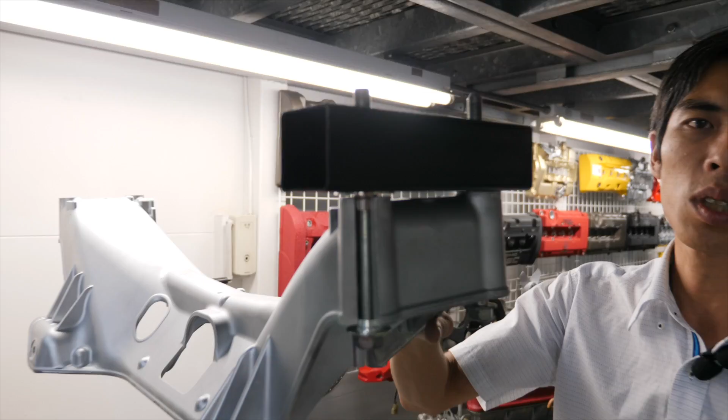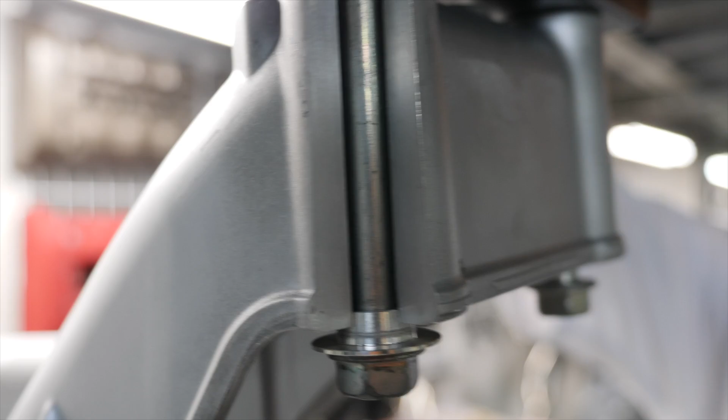Imagine this is the underneath of the car. This little aluminum structure here is what holds the suspension and the arms, and you've got the wheel and tire over here, and all these bolts are what link this frame onto the body. So the body is represented by this square block here, and this is the subframe. This one in particular is made of aluminium. From this hang all of the arms and the suspension.

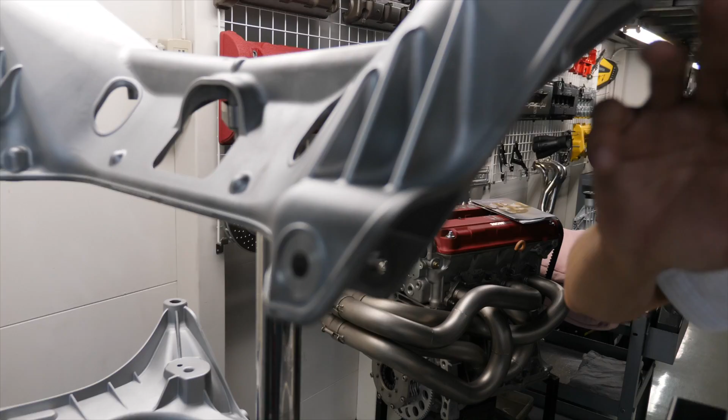For example, here would be a lower arm, and on this structure here, you can see that it's a rear structure frame. And this is an important part of the chassis because it holds the geometry of the suspension, and therefore, if it is not straight, you get discrepancies on the left and the right. Now, why is this so? A little explanation which is in this booklet.

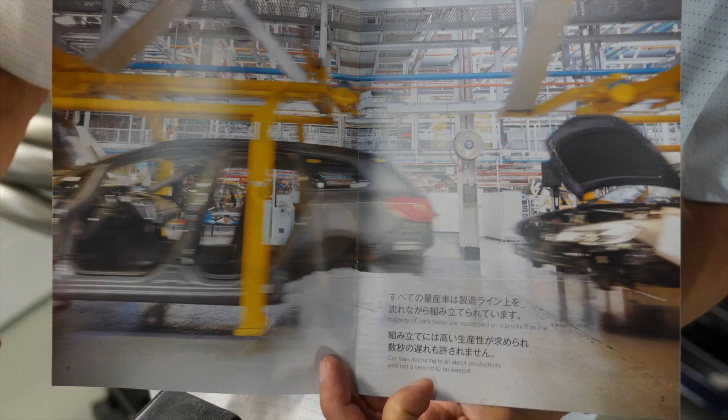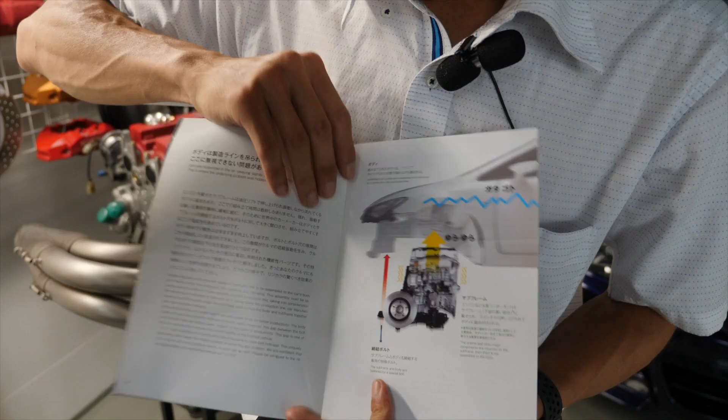Now, you can see here the production line of a vehicle as it is being assembled in the factory. A majority of cars today are assembled on a production line, and in a car manufacturing shop, it's all about productivity with no waste. So let's have a look at what happens when you have the body, which is suspended by a crane, held up mid-air, and the subframe, the suspension, the engine, all of it is added from below, as in this picture.

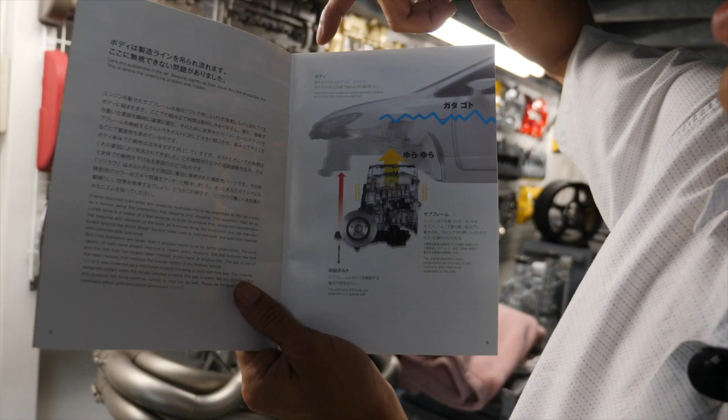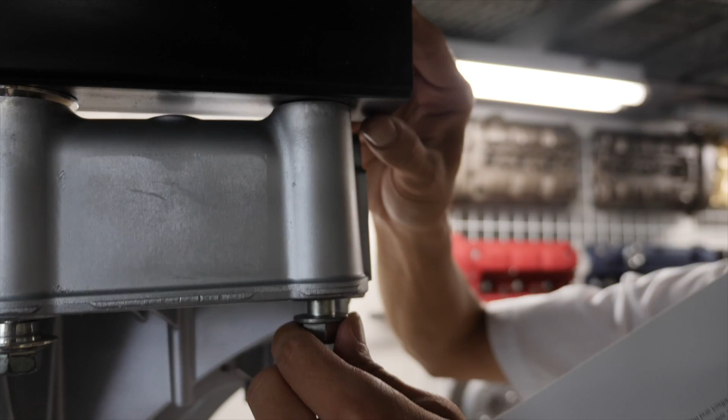And so these cranes are holding the car, and it's not stiff, it's kind of moving about. As the body is moving through the production line, it's swaying back and forth, and therefore it's not going to be exactly centered into the holes of the body. So represented by this, if you can see here, there is a bit of clearance and a gap, and therefore with this gap at all four corners between the body and the subframe, it will settle in maybe not precisely in the center. If you look here, you can see how there is quite a bit of clearance.

Now, what's the reason for this? Why don't manufacturers make it precisely in the center? Because it would take a lot of time, and production speed is important in manufacturing cars, and that slight difference can be offset by things like better alignment, and it doesn't really make that much of a difference to a normal driver.

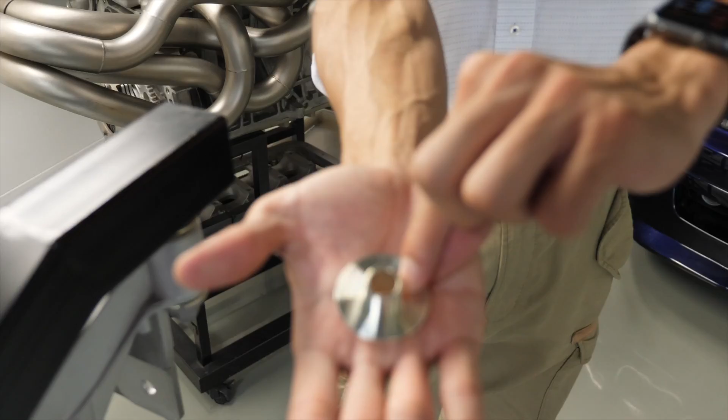But if you're an enthusiast and you are a driving maniac and you want to get that precise feel and have your car realizing its full potential, you want things exactly right in the center. It's the precision that is important. So the question is, how can a small piece of aluminium collar like this change the way your car feels on the road, the apparent stiffness and difference in handling?

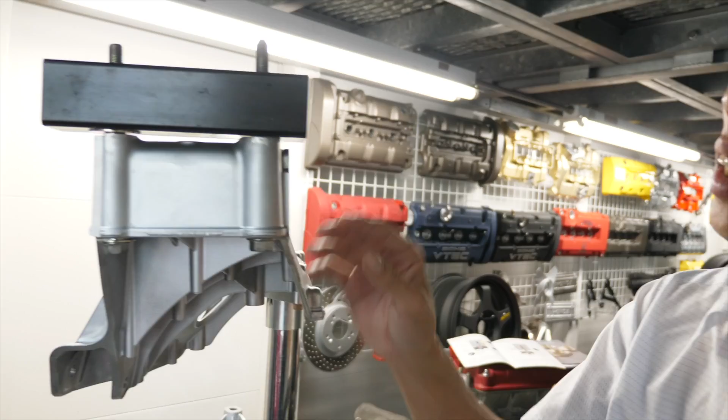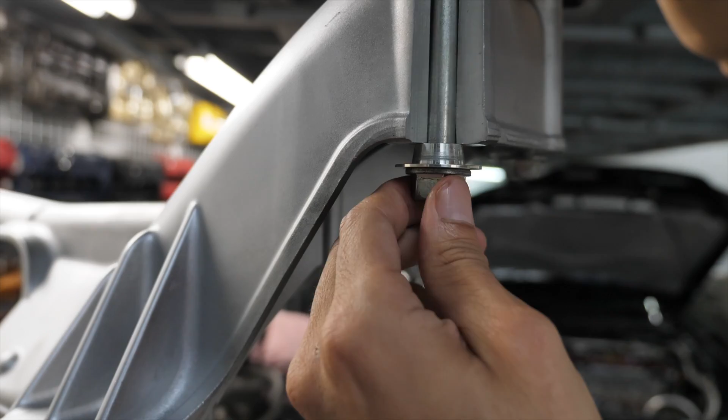Let's have a look at this cutaway model. So the collar goes in between the subframe and the body. It's really simple, and as you are tightening it into the body, let's loosen this for a bit. So let's say like that. Here you have little collars that are going into the groove of the subframe, and when it goes down, it actually centers the body onto the subframe.

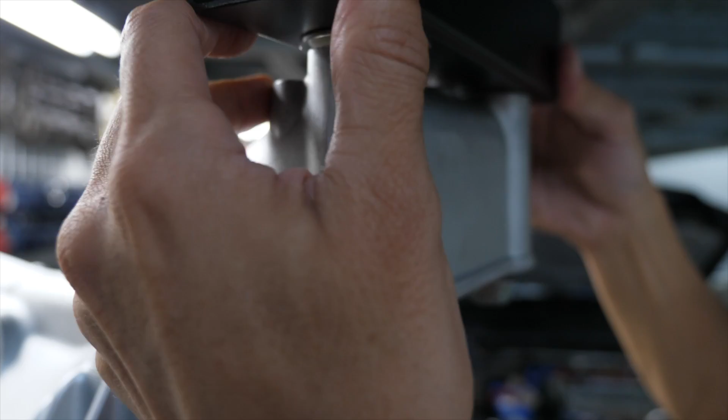So here it's not moving, and here on this side, without the collar, you can see how it's loose, and therefore if it gets tightened, it's not going to be exactly in the center. So this is the apparent problem. You can see also from this diagram that it explains that without the collars, there's actually a little bit of a gap. Now, some cars are designed with a 24mm bolt and some with 14mm bolts.

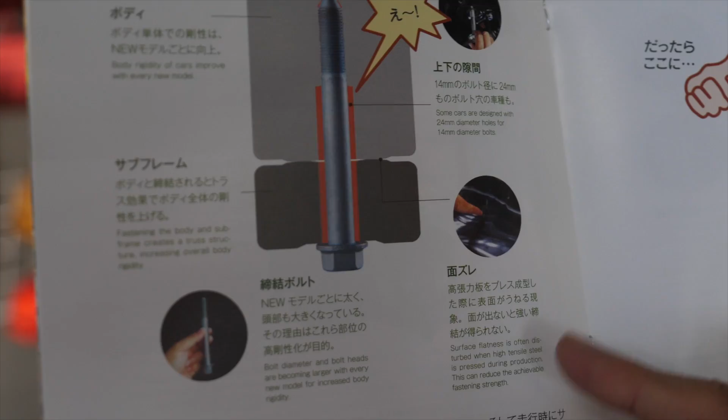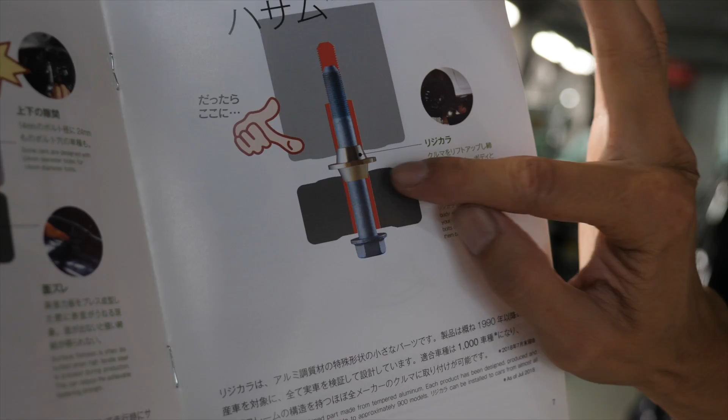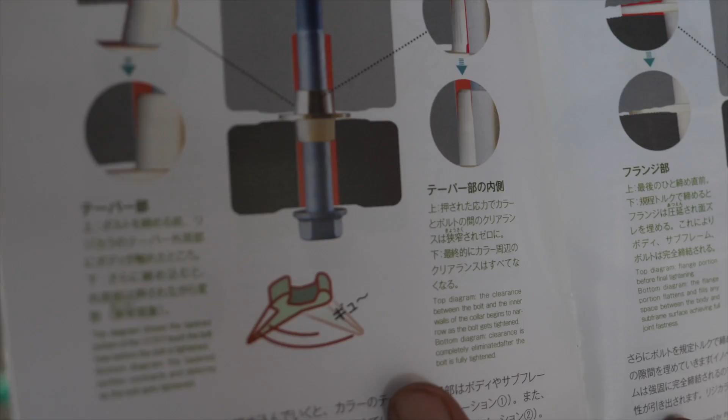And therefore, because of this surface flatness difference, it can actually be a little bit off-center. Now with these collars, it will be a perfect fit. What happens is these angles over here just squeeze into the gap, filling up this gap, and it gets crushed in, squeezed down like that, and therefore it creates a perfect fit, which also contributes to a feeling of body rigidity. Because if everything is centered and it's squeezed in tight, the feeling that you get is going to be less vibration and more accurate steering.

So once we get it fitted on the car, and we're going to have a look downstairs now at the whole process and the meticulousness in how they fit it by Spoon mechanics themselves, we'll go for a test drive and see how it really feels.

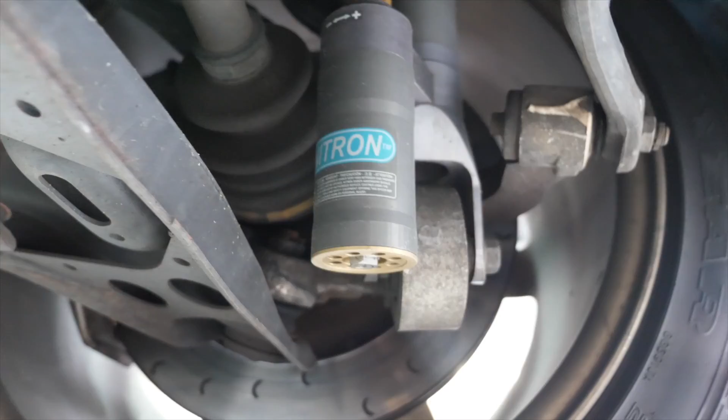Let me tell you about the suspensions. Suspensions are Nitron R3, so 3-way suspensions. They're pretty good, pretty nice. So riding quality on this car is not bad with those suspensions and big strut bars and stuff. We will see how it will change after we install those. I don't even know what to expect, to be honest, right now.

Does it feel loose a bit? It doesn't actually. I had a different 34 before. It was mostly stock 34. This is slightly tuned to 600 horsepower. You can understand the shake on the camera, I guess. It's not bad. It's not too soft. Actually, the suspensions are in the softest setting right now, since I'm not on track or doing touge or anything. In the city center, it's mostly the softest adjustments.

Let's do some pulls if we can, right there. Oh, I shouldn't get any other fines. I got fined yesterday. I got the police. I was speeding. They are making the car. They are making the roads. And I am only allowed to use a quarter of the speedometer. But I paid for the whole. I don't know. It doesn't make sense sometimes, right?

So this road is a little bit bumpy. And let's see the camera's reaction to... It's good. It's good. It's not that jumpy or bumpy or soft either. But we will see the difference after we install the rigid collars. Okay.

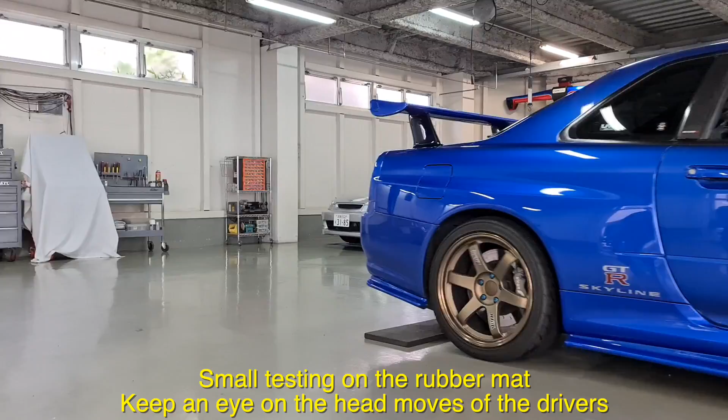You got that feeling? Yeah. All right. One more time. I got it.

So now we're going to begin the process of fitting the Spoon rigid collars onto the Skyline GTR subframe. Let's have a look. Here's the box that you'll get if you buy these Spoon rigid collars. And inside there are instructions, very conveniently, in Japanese, of course. If you don't read Japanese, fear not. If you're a home mechanic, you can read this. It's written in very proper English with clear instructions on how to fit the collars and what steps you should take. But we have the great opportunity here to have it fitted by the Type One mechanics themselves. So we're going to show you the whole process. Let's go have a look.

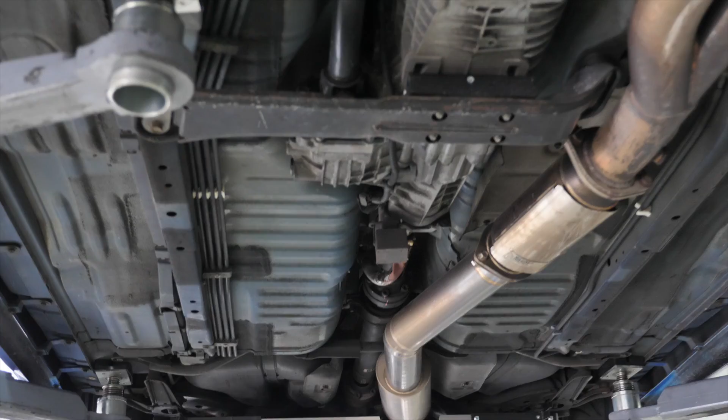Which parts do you put it on? No? Yeah.

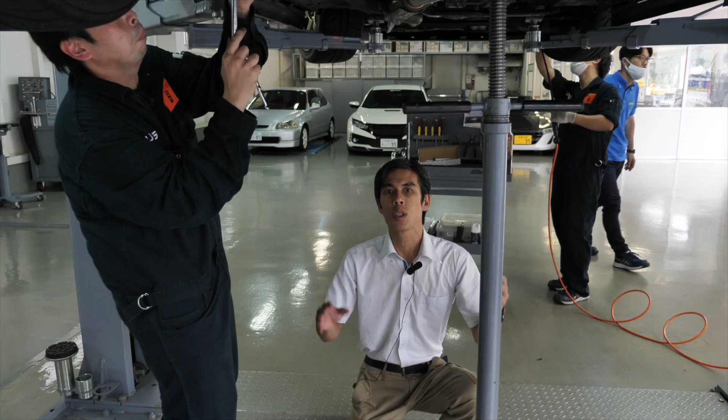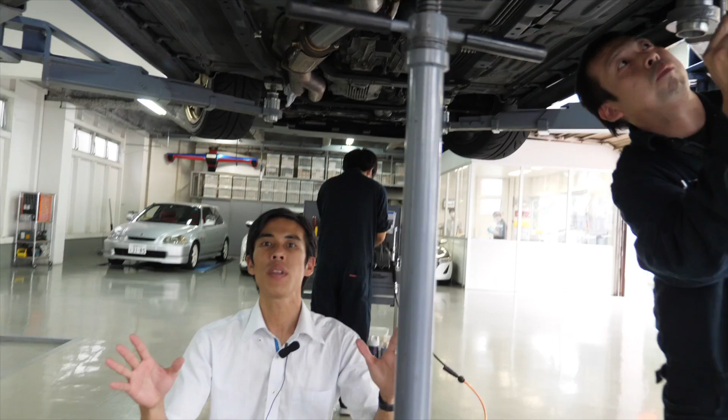And so we are now in the installation phase of the rigid collars into the subframe of the Skyline GTR. Now, with a subframe, you don't really have to remove the entire thing. As you can see, the mechanics are simply removing the main bolt that holds the subframe to the body. And this is where we're going to put the thin aluminium but very effective collar in between the body and the subframe. Hopefully we will see good results in stiffness and handling.

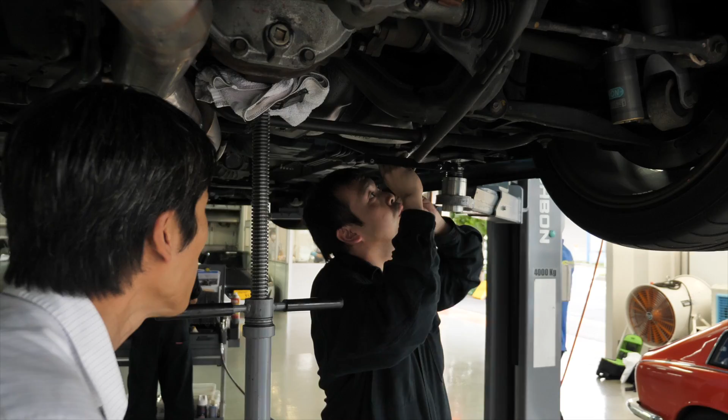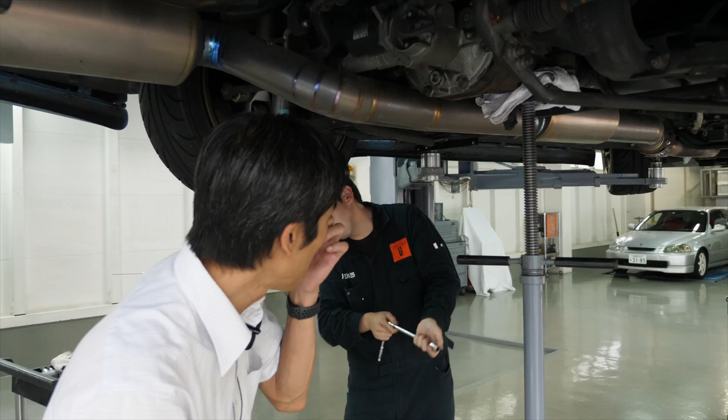So you can see now how the mechanic is carefully checking with a little mirror, just to check the clearance of the shim to see whether it's positioned accurately underneath the body, and it's a fine line, because the whole subframe doesn't actually need to be removed. It just needs to be centered slightly to fit those little collars in, and it's fitted delicately to make sure it gets into the center before tightening the bolts again.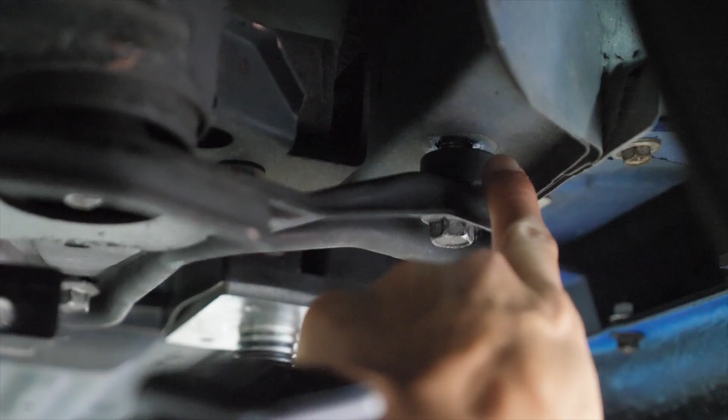Now we'll probably have to go and run it for a while to let it set in, and it's probably best to get an alignment after that. The good thing is that the car already had a good alignment before, so it was a good test of equal conditions. Now there is a gap between the lower frame, this is actually the stabilizer, and the body here.

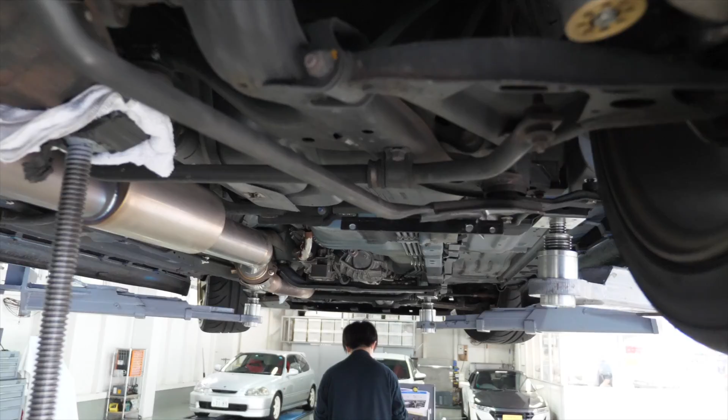So it's in the loosened position, and we're going to start tightening it evenly left and right. And the last process will be to torque it according to spec. And it's very important to do this process because every bolt in the car, actually in any machinery, has a correct torque value. It needs to be carefully done by a very accurate torque wrench. And it's all skill of the mechanic to also do this.

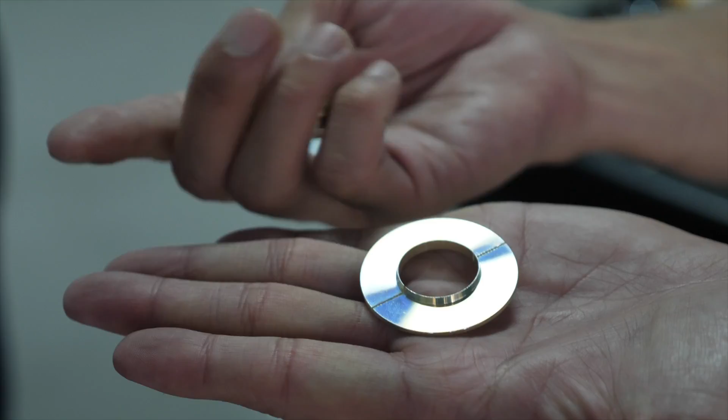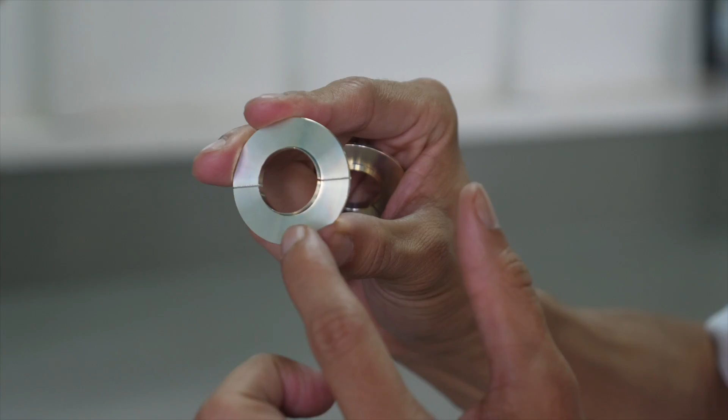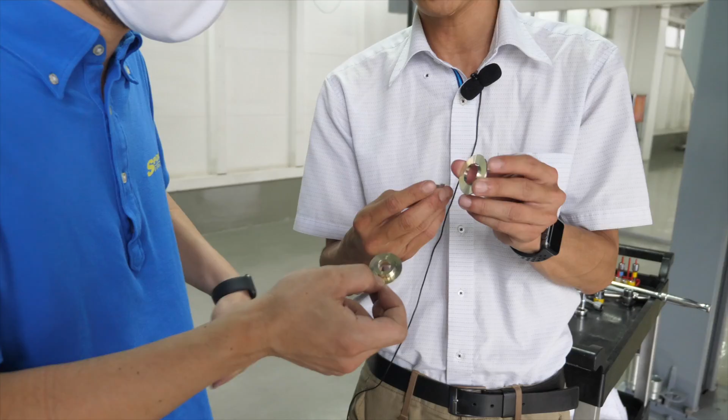Let's have a look. These are the collars. They will be fitted in between the subframe and the body. And so basically this will go in, and as the bolts are tightened against the lower part, it will actually crush and form a depression, centering the subframe onto the body, where this process is not actually possible by manufacturing in the factory. So we're going to be talking with Jomoto-san, and he'll explain to us a little bit about the features. Jomoto-san, why is there this line?

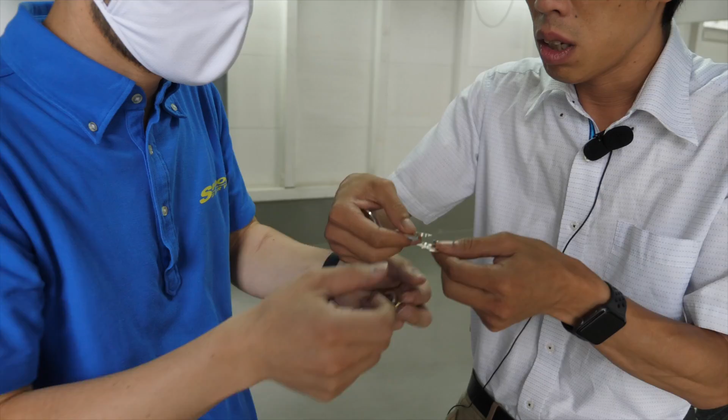So it depends on the model. For the Skyline GTR, you have to split it and lower the frame and connect it back and then tighten. Is it okay? Really? It's fine like that.

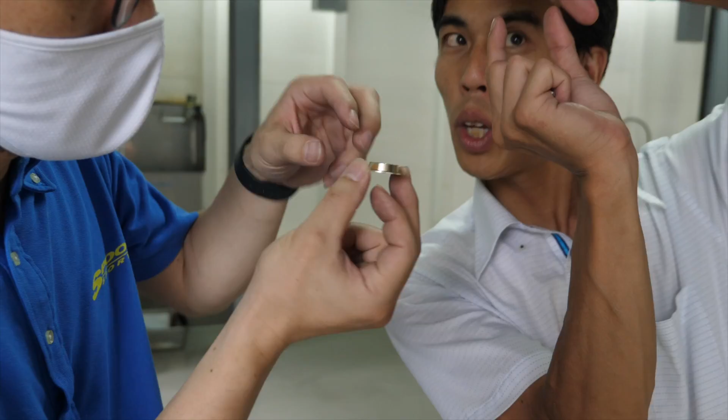Ah, so this very thin groove will go into the gap of the body. I see. And it will just slowly go in like that. Interesting. Interesting.

Very, very high grade industrial strength aluminum. Industry secret. Industry secret. What kind of grade? Probably used in aircraft.

So now the mechanic is carefully creating a gap in order to put the collar in between the subframe and the body. And you can see here that he's using this very interesting straight jack in order to support the diff. So it's being placed in the diff now, which is also connected to the subframe in order to hold it in place, as he's carefully adjusting the level.

And once the collars are put in, he'll slowly tighten it a little bit on the left, a little bit on the right, and these are just really basic processes that are very common in automotive mechanics and also when fitting anything on a car. You want to make sure that the tightening forces on the left and the right are done slowly and as even as possible in order to get the highest accuracy, because it is all about the accuracy.

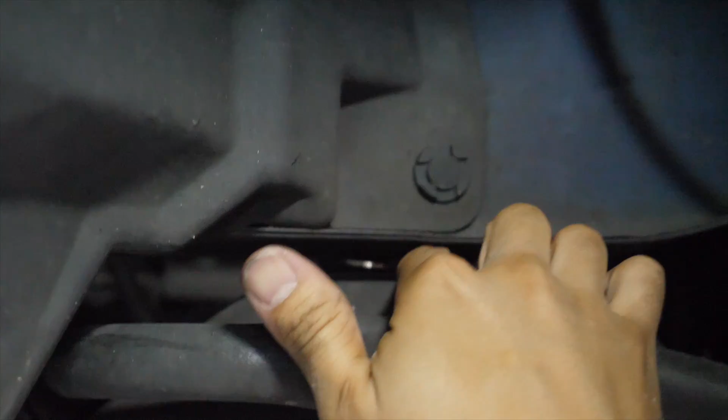And we go over to the front and we can see also the mechanic is doing the same thing. He has a high power jack, and this is a kind of workshop jack that is used usually to lower transmissions. And you can see now he's splitting the collar and fitting it on each side of the front main bolt subframe. And you can see now that he's carefully inserting the two halves of the collar into the front bolt, the main subframe, just pushing it in.

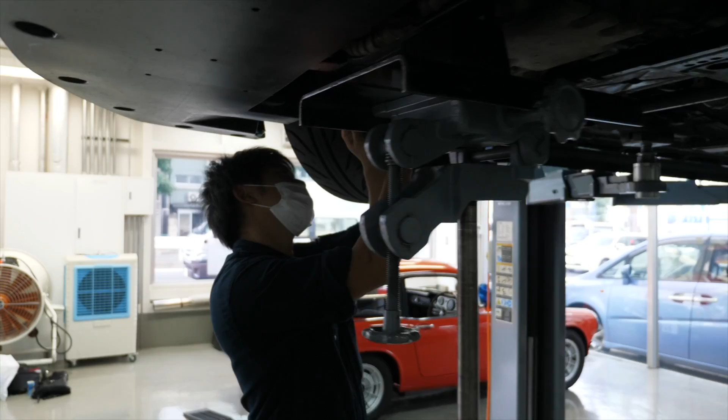And it's all about experience and feel and using a little pick in order to get it into the right position. And this is very, very crucial because that thin piece of aluminum metal has to squeeze into the groove of the body. And you can see here he's also doing it on the left and the right, bit by bit, slowly, both mechanics working in tandem to get this job done in actually quite an impressively short amount of time.

Now on the Skyline GTR R34, there are these front diffusers and rear diffusers, and so unfortunately that of course has to be removed in order to get access to the bolt. So it's taking a little bit more time. A lot of newer cars do have these kind of under trays, but with the older cars, for example like the 90s Civic or whatever, it would be a lot easier.

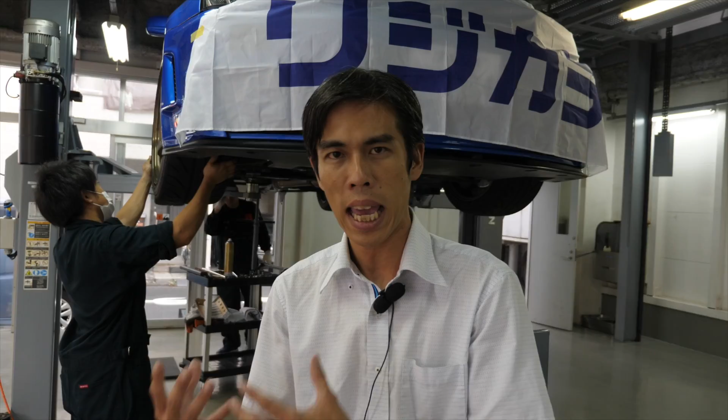But is this a process that you could probably do at home yourself? And yes, if you have experience in mechanics and you want to try it at home, it is possible, but we recommend that you take very great care in adjusting the left and the right and making sure that those little grooves are inside and tightening it according to torque spec. Otherwise, you're not going to get the best results.

And one thing to note is once the collars are in, they will be squeezed into the center and crushed into place so that it maintains an exact center line of the subframe and the body. So if you kind of mess it up once, you're going to start all over again and buy a new set.

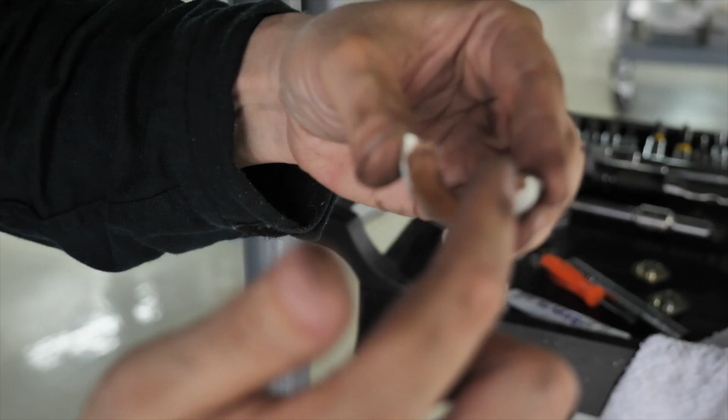So be careful. Now before fitting the collars, it is very important to put on this copper grease, the same type that's used on brakes, in order to make it easy for it to fit in when the collars actually get into the body. So you can see now the mechanic applying grease, not too much, just with your finger.

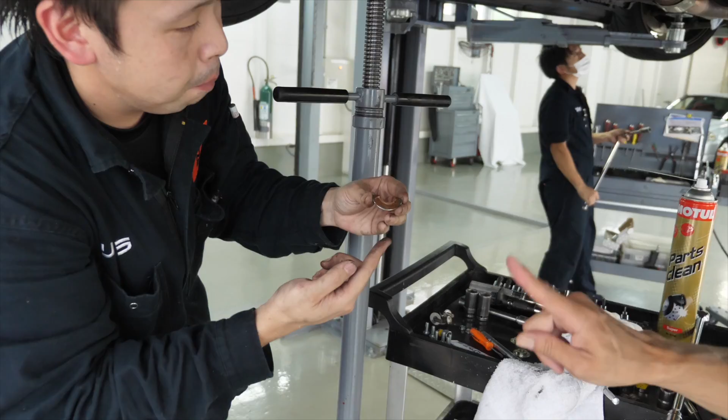Kind of like that. And so let's have a look. So this is one half of the split collars that's spec'd for the Skyline GTR. And you can see that it's a really, really tight fit. He's using his fingers to carefully put the two halves from each side. There we go.

He's using a very thin feeler to push it in ever so slightly to get that fine adjustment done. And then also trying to shift the subframe and get it just precisely in. Now for those of you who want to try this at home, take note of this process because it is very important to get it exactly in the center.

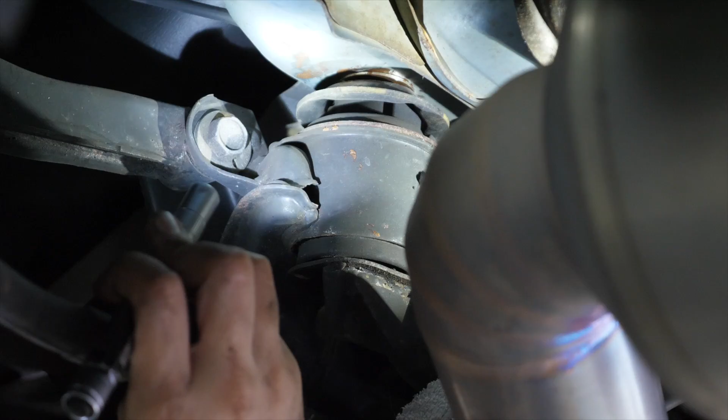All right, and now the rigid collars have been fitted into the car, and we're going to do the bounce test on the rubber mat again now. So Japonic, let's go. Definitely feels different. It feels different? Yes. Try it again, try it again. Okay, it's going to do it one more time, a little bit faster this time. What do you think? I felt a bit softer but balanced. I don't know. I can't describe the feeling, but it feels better.

All right. So it's going to be the same as before we fitted the rigid collars. I'm going to keep my head straight and see if I can feel any difference in the way it moves. All right, here we go. First gear. Yeah, it did feel different. All right, I'm going to try it one more time. I'm not really convinced. Reverse. One more time.